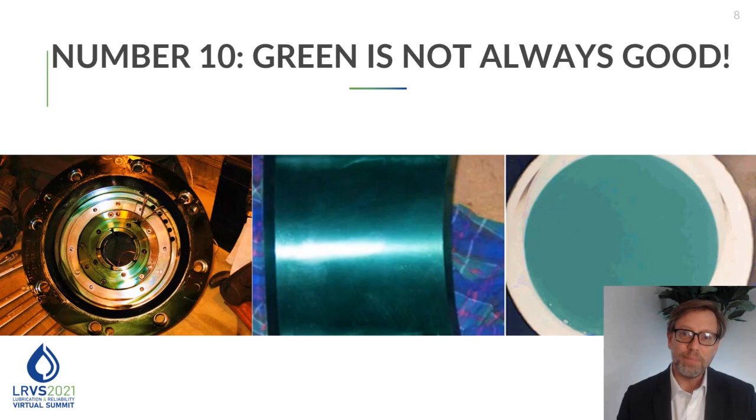So new car smell good, green usually good, but green phthalate type deposits not so good.

Number 9, low MPC does not mean varnish free. Just to preface this, the membrane patch colorimetry test became an ASTM procedure in 2013 and is by far in our industry the best tool that we have to predict the onset of varnish and to allow us to understand from taking an oil sample how prone a system is to varnish. But it does have limits, and it's important to understand these limits.

So this is an example from a nitric acid compressor train. The bearing temperatures were high, very, very high, 115 degrees C, and the MPC in the system was 12. So low MPC doesn't always mean varnish free. To go into the details on why this is would take another course, or certainly longer than we have today.

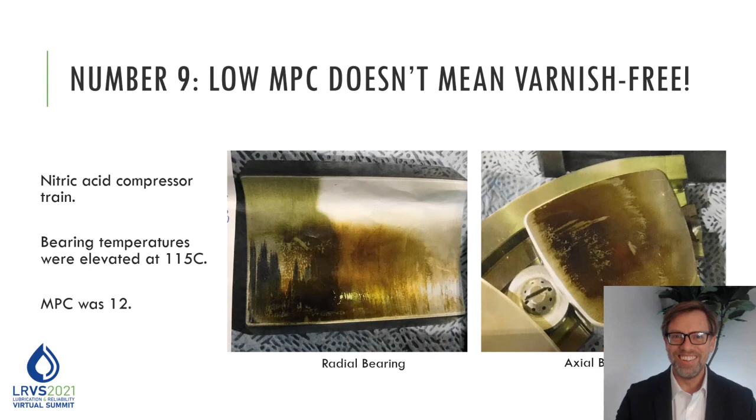Anytime you see this kind of splotchy appearance on a patch, it typically indicates the MPC is kind of maxed out, and now in many cases you'll see the MPC level go up and up and up and hit a maximum and then actually start going down a little bit.

And so this oil at week 12 is actually more degraded and has produced more deposits than the oil at week 9, even though the MPC is a little bit lower. So just keep that in mind. There's not always a direct correlation to the higher the MPC, the worse varnish potential the fluid has.

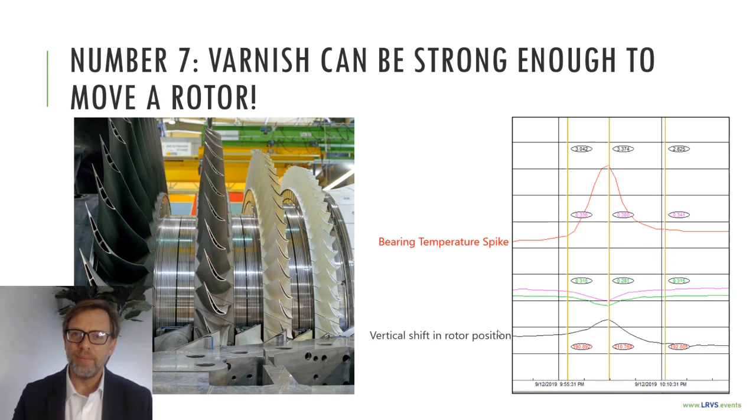Amazing. Number 6, varnish can be turned into bulletproof vests. Well, not exactly. However, there's a really cool reaction that takes place if you have ammonia that may be ingressing into the oil, reacting with degradation products from the oil. So one of the key degradation products due to oxidation are carboxylic acids. These can react with ammonia and create this substance called a primary amide.

It's important to understand because this is a high molecular weight material, comes out of the oil very quickly, and this is another case where it may be challenging to actually measure the presence of these deposits through the MPC test because it doesn't stay in the oil that long. The other use for amides is actually in the manufacturing of Kevlar. And Kevlar, of course, we use for bulletproof vests. So in fact, this reaction that we see in the oil is somewhat related to bulletproof vests.

Number 5, varnish doesn't necessarily kill all your oil properties. This is a little bit counterintuitive. If you think about varnish and these degradation products as being polar, you would think that it would have an impact on things like, say, foam or the oil's ability to separate from water, the demulsibility test. In fact, we don't necessarily see that. And this is an example here where we have 350 samples of a wide range of different MPC values and a wide range of different demulsibility characteristics.

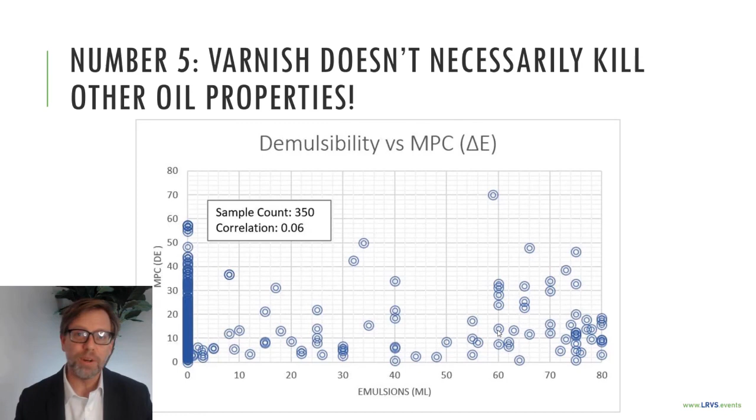And then we correlated these. What is a correlation between this? If you had a perfect correlation, it would be 1. And if it was inversely correlated, you would have a correlation of -1. Our correlation here is 0.06, which essentially means there is no correlation. The higher the MPC, it doesn't necessarily mean even the introduction of these polar constituents will negatively impact properties like demulsibility. These are more often deteriorated by the presence of contaminants.

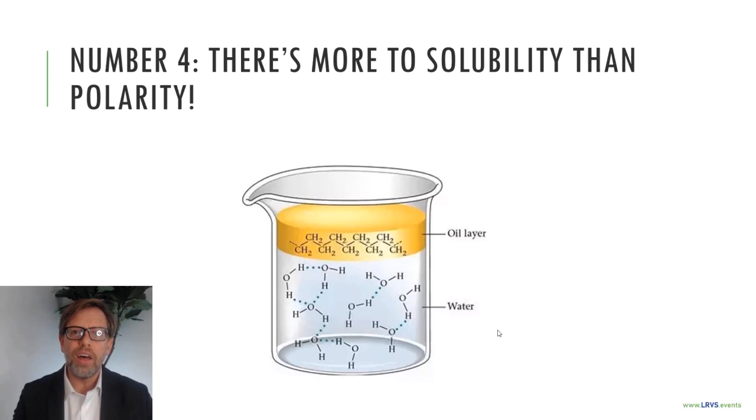Number 4, there is more to solubility than polarity. Most people will know that oil and water don't mix, and the reason is that oil is nonpolar and water is polar. So polarity has a tremendous amount to do with solubility. However, if you just focus on polarity, and in our oil world we would think of this as maybe the aniline point, you're actually missing a couple other factors here that are at play. So certainly polarity is one factor. Another factor that we see is also hydrogen bonding, and a third actually is dispersive forces.

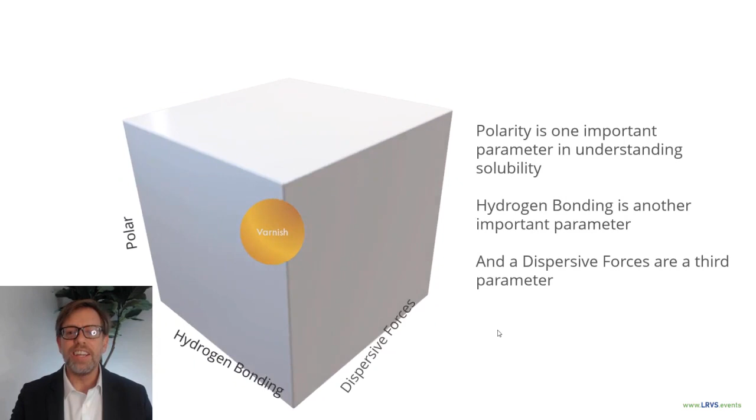So if you understand all 3 of these forces, you can create a 3D model and really understand the characteristics of the varnish or the degradation products, the characteristics of the fluid, and you can understand where and when and how this varnish will come out of solution.

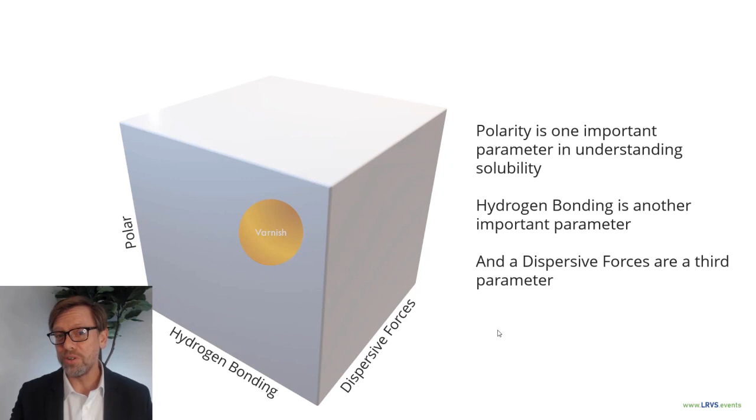Number 2, formulation plays a significant role in varnish. This is also a little bit counterintuitive to some. We know that, say, in the world of turbine oils, the vast majority of turbine oils are base oil with a small amount of antioxidant. So one would maybe suspect that there would be some similarities between their performance, but in fact there's not. There's a pretty significant difference in how these different oils are formulated.

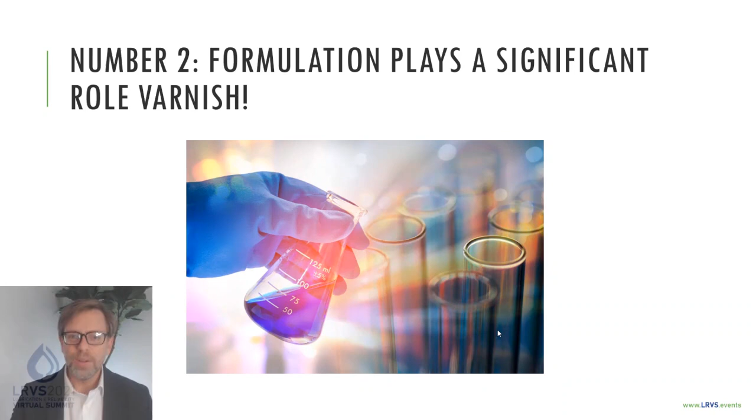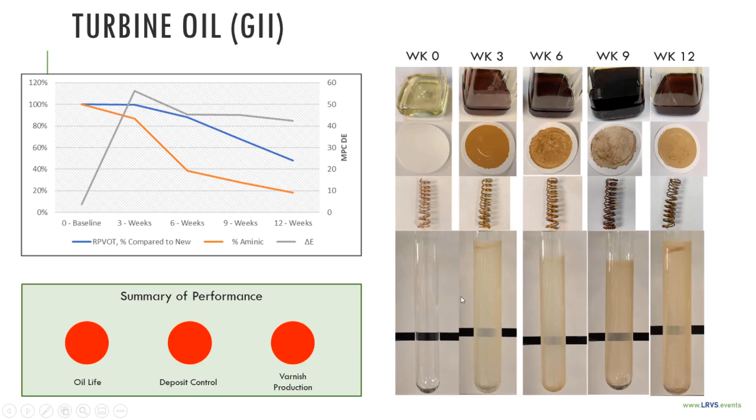So here's an example of one type of Group 2 turbine oil. You can see the life of the oil over this 12-week accelerated oxidation test. The antioxidants have depleted, the RPVOT has dropped, and we also see an increase here in the MPC test, as well as actually deposits here in the glassware.

We can compare that to another Group 2 oil. In this particular case, the life of the oil is a little bit improved. The RPVOT and aminic antioxidants will last a little bit longer. In this particular case, we actually didn't really see any development of a stain on the patch, and no stains whatsoever in the glassware. So this particular formulation, fantastic deposit control properties.

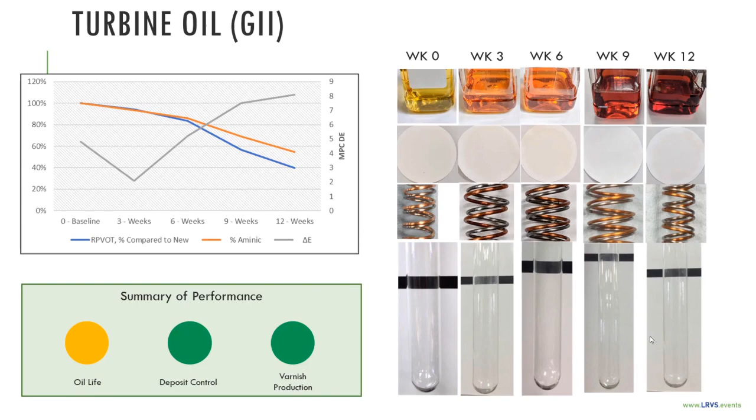And then we go to next gen oil. This is a Group 3 turbine oil. Actually, in this particular case, the antioxidants and RPVOT retention was very, very good. So this we would expect to have a very long oil life. However, there was a little bit of a stain here. This is an MPC of about 31, so a little bit of a stain on the patch.

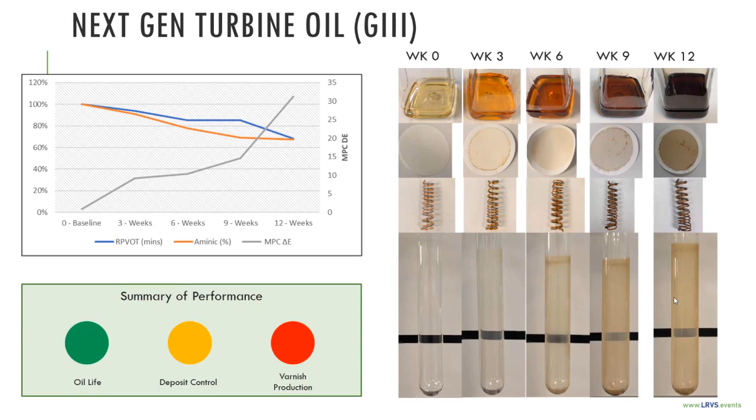However, the amount of actual stain on the glassware is pretty equivalent to the first example that we looked at here with the older generation Group 2 oil. So not necessarily a correlation even between the MPC stain and the stain that we see in the glassware. Also, Group 3s are not necessarily better than Group 2s. It really comes down to how the oil is formulated and how these antioxidants are all balanced together.

And here we get to the number one thing about varnish. There's still a lot we don't know. So, for example, we may have a combined cycle power plant. Two exact models of turbines at the same plant, commissioned at the same time, the same oil, identical duty cycle, for, say, until their first outage for 48,000 hours. One system has varnish, the other doesn't. Why is that? There's many theories and hypotheses about this. We don't exactly know the details on this yet.

Varnish chemistry. Another key thing that we're still understanding and trying to better figure out. Why does varnish, the same types of varnish, form both in really cool parts of the system, where these degradation products are precipitating out, coming out of solution, and also form in the hottest parts of the system, even though they're similar varnish?

Finally, varnish testing. MPC is super effective, especially at early detection of varnish. However, once you get to a certain level, it's really hard to differentiate, and especially in, say, non-turbine applications in the world of hydraulics and other applications where you would have a tremendous amount of thermal stress in the fluid, we still need to look at other tests in addition to the MPC test.